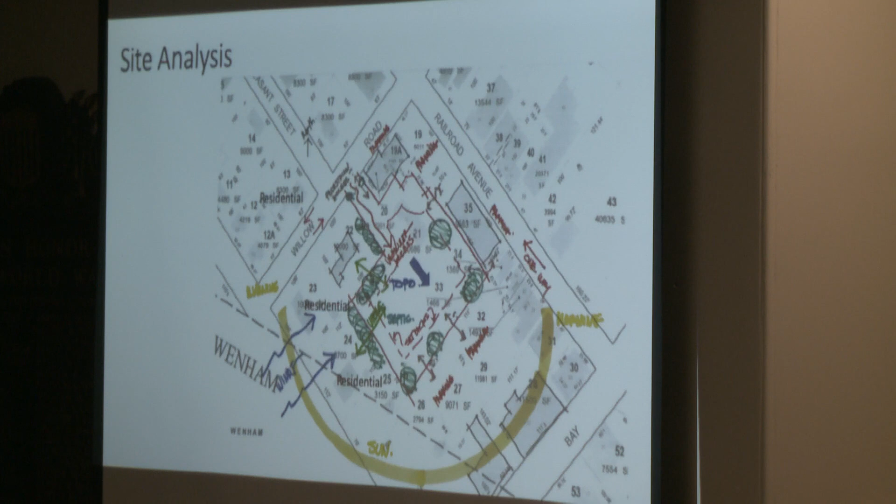And then, of course, we have the existing site plan that, as Joe mentioned, the high point is at Willow Street, and it comes down to kind of a bowl shape. Charlie and April will discuss the fact that this collects a pretty good sized catchment area of surface runoff and how that would be handled.

The other things to note on the site are the residential properties bordering it on Willow, and the commercial properties on the other two sides, which kind of informed where we decided to put the building. So this is where we ended up.

The building is kind of L-shaped. You see here it's pushed as far toward the Railroad Avenue side of the property as we could. We have a 15 plus, maybe 6-inch foot setback on that side, to allow the maximum amount of buffer zone to the neighbors on this side.

There's a stand of really tall trees in here, which we wanted to preserve. We've got a fence coming in here, a 6-foot privacy fence, a row of arborvitae here, a mixture of cedar and plants in here, and some Rocky Mountain cedars. So the combination of eastern white cedars, or eastern red cedars, and Rocky Mountain cedars are in here to provide a good buffer.

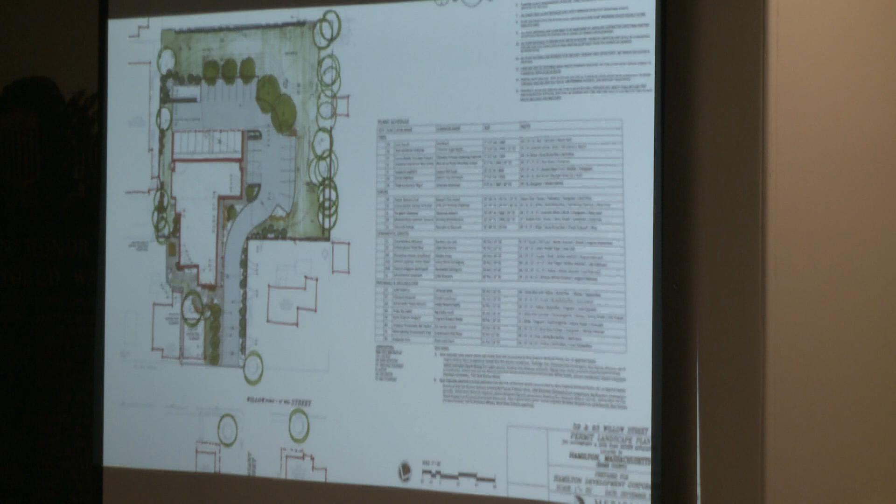So in the floor plan, the far left of the sheet is on the Willow side. This is that colonnade I talked about. A T-shaped building does reduce the apparent mass of the building because you sort of see one leg and then see that leg rather than the whole length. This side, of course, is against the Railroad Avenue side.

As mentioned, that's the commercial space, and then these are all support spaces for the residential project - the sort of birthday party room called the Commons, and a fitness and wellness room. Sometimes folks want to work at home, so we give them a little office they can work from. There's storage for tenants for some of their larger items, and then trash would be brought in here and then brought out this way. And again, as Jill mentioned, an elevator, and then of course the carport for the balance of it.

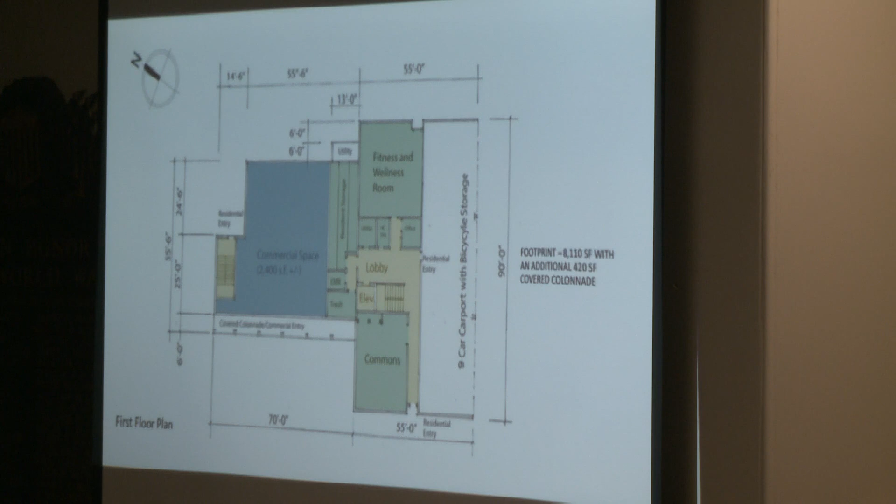As you go up to a typical floor, the second and third floors are generally identical. There are, as shown here, 18 units, 9 per floor. 4 of them are 2 bedrooms, 14 of them are 1 bedrooms, so a total of 22. It's about 8,300 square feet per floor. We have the 2 bedrooms on the ends here, kind of on the corner.

Where it seemed appropriate to provide some exterior small balconies, we've provided them. There are some places where we have these Juliet balconies, which is basically a doorway opening up to a railing that allows some fresh air in and a little more light, but it's not something you'd step out onto. I know at one of the abutter meetings I wasn't at, but I understand there were some balconies here, and there might have been some concern about being a little bit too close and looking into their backyard. So we thought pulling those back would be beneficial as well.

But so basically, the typical floor plan has a ring, this sort of L or T shape of units wrapped around a central core that has an elevator and a stair, and probably a skylight on the roof that might let some light down into the middle of the building. Units are roughly 650 square feet for a 1 bedroom, which is a pretty good sized 1 bed. There are a couple 1 beds that are a little larger. Sometimes we'll put in a small open alcove room where somebody might, again, work from home or have a little extra space within their unit. And then the 2 beds are 800 square feet.

The goal is to have these be reasonably affordable apartments, generous enough but affordable. And I think the little bit of extra storage space on the ground floor to have your bike and your artificial Christmas tree or whatever stored off season is being provided. With the elevator, we can have accessibility up so someone visiting who might have some mobility issues can get up to the 2nd and 3rd floor. It's a nice amenity to have in a building like this.

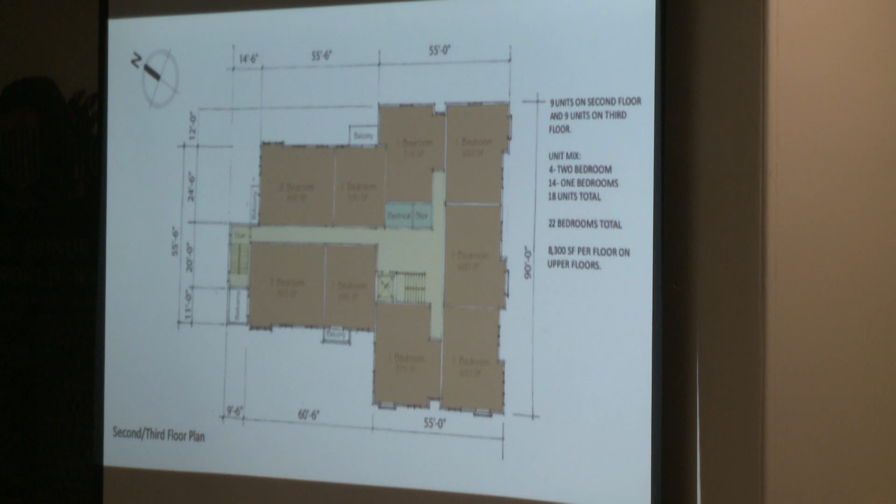The materials are traditional in New England - we have a shingle band running across the top and sort of a clapboarded secondary line, and then kind of a board and batten look down on the ground. Again, kind of layering this helps make it seem a little less tall than if it was just one sheer wall. We have a fair amount of texture. There's like a bay window that pops out here, and these decks help provide a little bit of mass so it's not so much a sheer wall.

The roof, there's a flat spot up here, but from all sides you can't tell, and so that was where we can put our air conditioning units and keep those in the center of the building to reduce any kind of noise impact. Also, the elevator overrun can be contained within that roof structure so that you won't be seeing one of those boxes that I understand can sometimes be controversial.

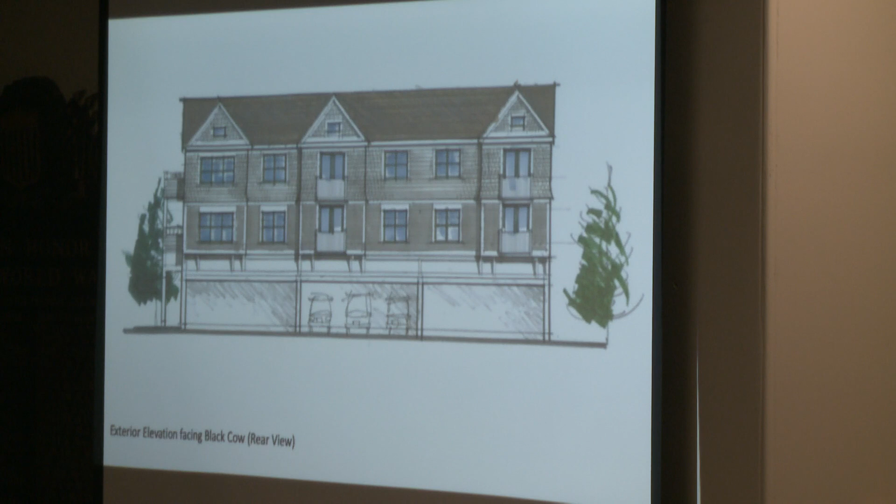This is the carport view from the Banks parking lot and the Black Cow. There's the carport for the 9 cars, and we're using these projected gables to again help reduce the apparent mass of the building and not have it be a big sheer wall, as does this treatment of the shingling versus the clapboarding. Some of these gables are helping to articulate a more traditional New England kind of commercial vernacular architecture.

If you could take down the Timeless Interiors building, this is what that view would be, the Railroad Avenue view. The truth is you really pretty much see this end kind of poking out into the town parking lot, and this end will be pretty difficult to see.

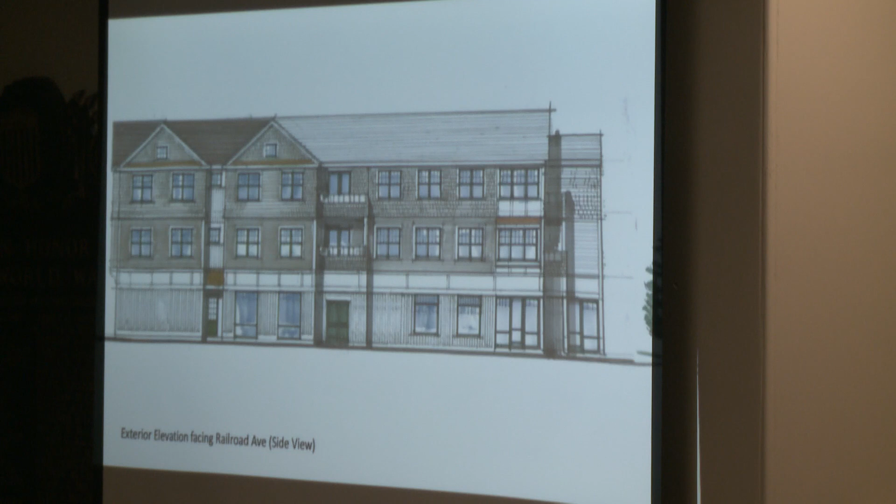We have a door coming out near that fitness area, so folks who might be going for a run can come in and out of that door. This is a service door to access some mechanical equipment, that kind of thing. And you can see those balconies are again helping us, we think, with the massing reduction issue.

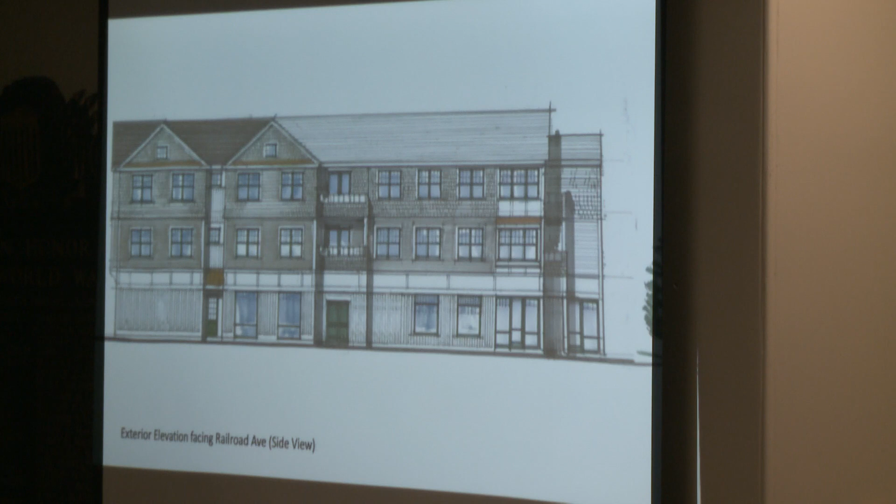L shape does for the massing. So there's a bunch of building in that back corner that you're not aware of from any angle, unless perhaps an airplane.

And with that, I'll turn it over to Charlie or April to talk through drainage and utilities and all that. And then at the end, I do have slides with some cross sections that will answer your question, Mr. Clark, about total height and that kind of thing. That's okay.

Step to the next one. What do I press? Next one. Okay, I'm gonna

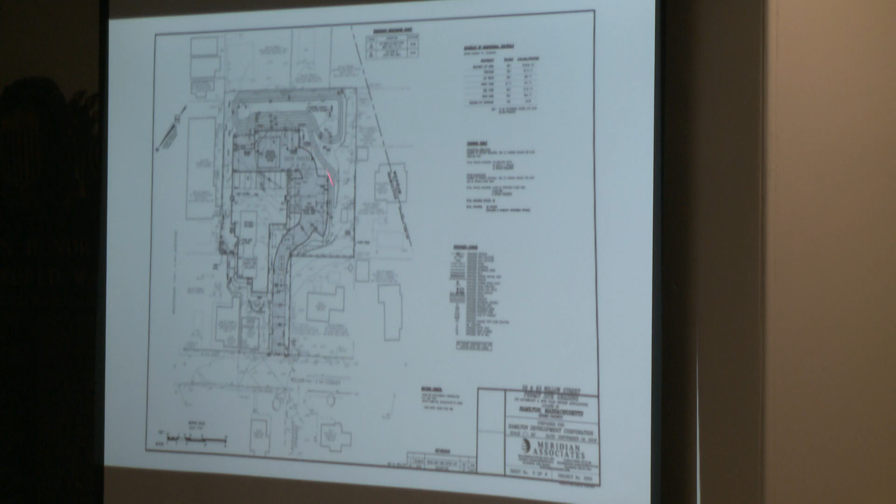What about my basement? Is my basement going to flood? Two things about that. Number one is that the stormwater which runs to this site is the same volume of stormwater that runs there now. The stormwater doesn't get out of the site. As I said, there's no outlet.

So the water that runs is about 2.2 acres that runs. So the volume of water in both the pre-construction condition and the post-construction condition are the same. So we're recharging the same amount of water to the ground.

The second part is, what about your septic fields? You're adding water from that? Yep. Okay. And in a septic system, the septic system here, if you take the amount of water that runs—and I'll get back to that—the septic system is about 2,600 gallons a day. In terms of cubic feet, that's about 350 cubic feet per day.

It's less than 1% of what you would anticipate in a large rainstorm. It's a very small amount, comparatively speaking, of the total water that gets there.

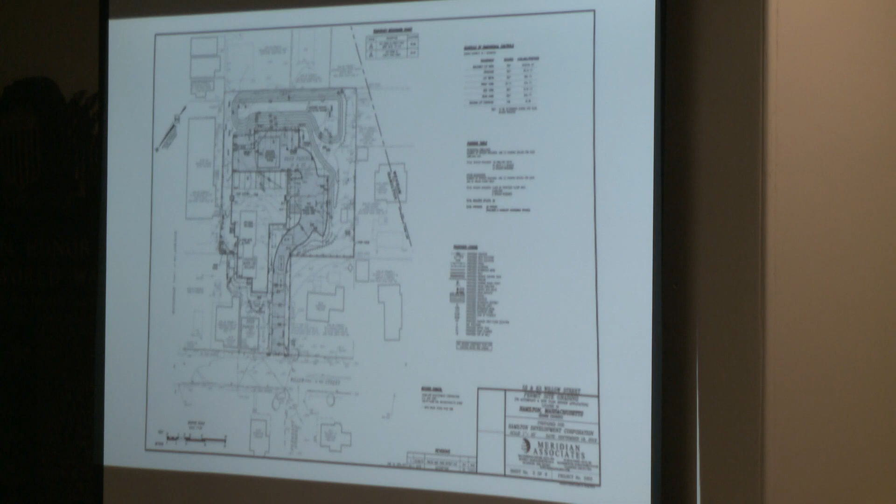And the reason I had started off with the explanation about the groundwater, in comparison with a river, is that in situations like this, the impacts—the groundwater—there's really too much water for even 2,600 gallons a day, and that's why I go back to this.

This is really a very small site. Just imagine that this whole area is groundwater that's running, and we're adding a small amount. Actually, we're not adding any amount from rainfall, and we're adding a very small amount compared with the septic. What happens is there's just too much water to raise the groundwater table.

Now you will get what's called a mounding effect. The mounding effect will happen directly below the basins, directly below the sewage system, the septic system, and it'll happen right directly below the drainage system.

That mounding is usually only a few inches, and given this type of soil, the very gravelly soil, you probably will only get a mound of a few inches, and it dissipates very quickly when you get away from the basin itself.

Usually only 10 to 15 feet beyond it, and then there's no impacts at all. So that's why they call it a mound, because it's a small mound that occurs over the system. So the installation of the septic systems and promoting infiltration on the site, which is occurring now, will have, in my opinion, no impact on the height of the groundwater outside of our site, and will have no impact on any of the abutting properties, septic systems, basements, or any of that. So I think that's probably about the end of my presentation.

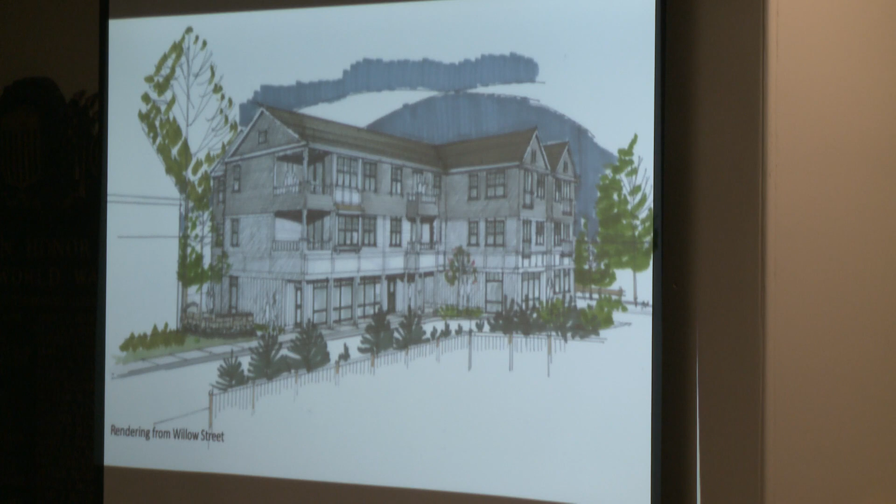Thank you, Charlie. So we took some site sections.

With the road being at, is that right? So it's 56.8 - I gotta get my glasses fixed. 56.8 here and 59.6 there. Yeah, so it just comes down a little bit.

And our building is sitting here, and the height of the roof, Krista, is that elevation from... It is.

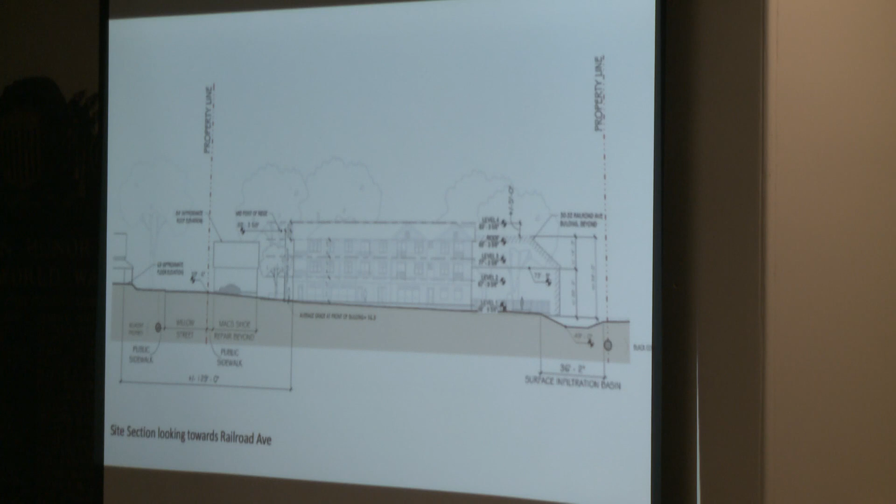Remember, the 35 or 36 feet is not at the wall of the building. We have a sloped roof, and it's well back from the actual face of the building, so you're not seeing it at strict elevation as shown in these drawings. What you do feel is the height of the wall, which is in the range of 30 feet tall. My guess is the town hall might be about that to the eave. It's kind of in that range.

This is where I mentioned we're proposing the new fence and an arborvitae screen in conjunction with the existing trees that are there. Part of the strategy of keeping this building close here and breaking up the parking lot was to reduce the impact here. The septic system is basically far enough away from those trees that we expect them to survive the installation of the septic system.

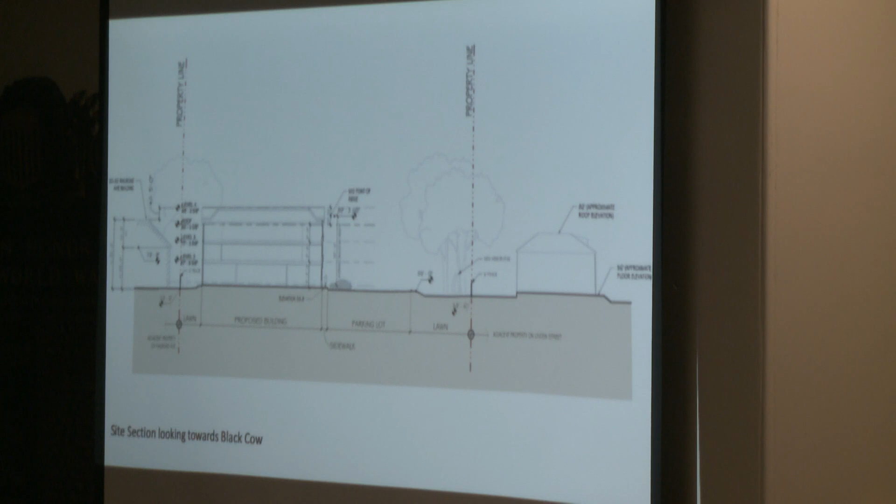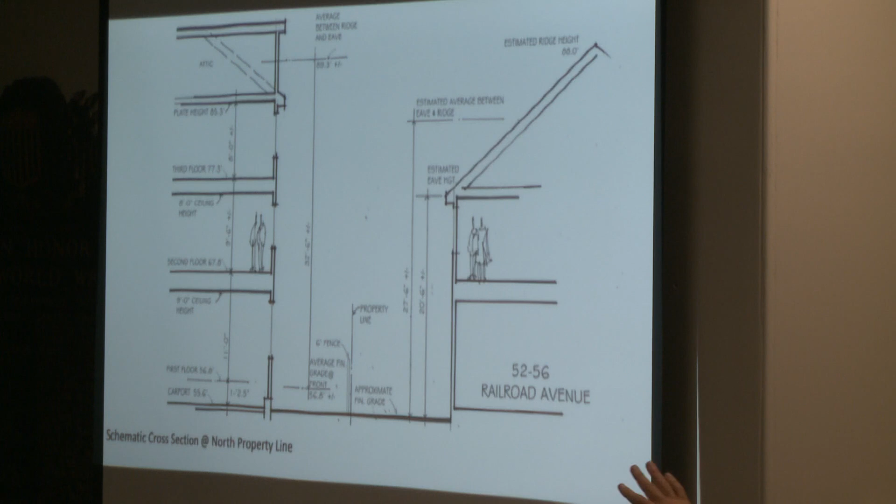If you were to walk in the alley between the Timeless Interiors building, I'll call it 52-56 Railroad, and our building, heading toward Willow, you can see the relative heights. If you're out here on Railroad, you can't see this building. Even though our ridge is higher, it's sufficiently set back that you won't be able to experience it. There will be peaks as you go down Railroad and look through the alley, over the top of the House of Pizza, you'll see bits and pieces of it, but I don't think you'll ever see this thing as this large arc of a building sitting on the site.

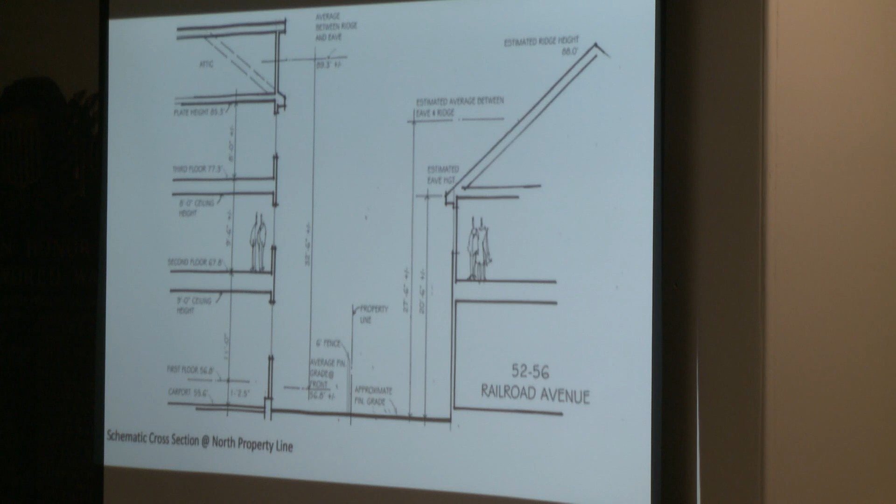We're looking at ceiling heights appropriate for commercial use, not overly generous, 8-foot ceiling heights for the residential units, and then this attic space where, again, we mentioned putting some mechanical equipment, that kind of thing. So we are 32 and a half feet to that midpoint and 36 feet to the ridge from average grade at the front.

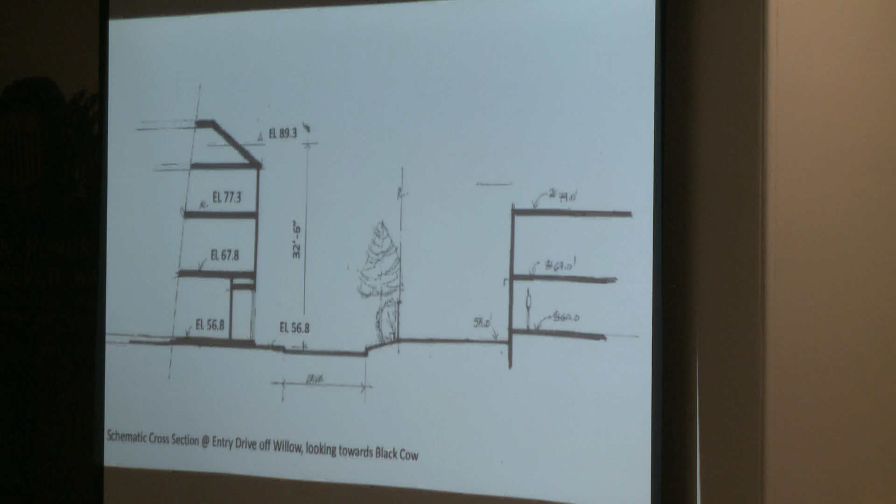And then last, just some lighting. We don't want to overlight this, and we don't think we need to. We have purposely put building overhangs in so the lights can be in the overhang, so you just see the glow of the light, not the source. We have used some bollards to mark walkways, but they're low height bollards. There's no light at all back in here. Even the carport light is up in the ceiling and recessed. There'll be some spillage out which will allow folks to safely traverse the site, but not overlight it.

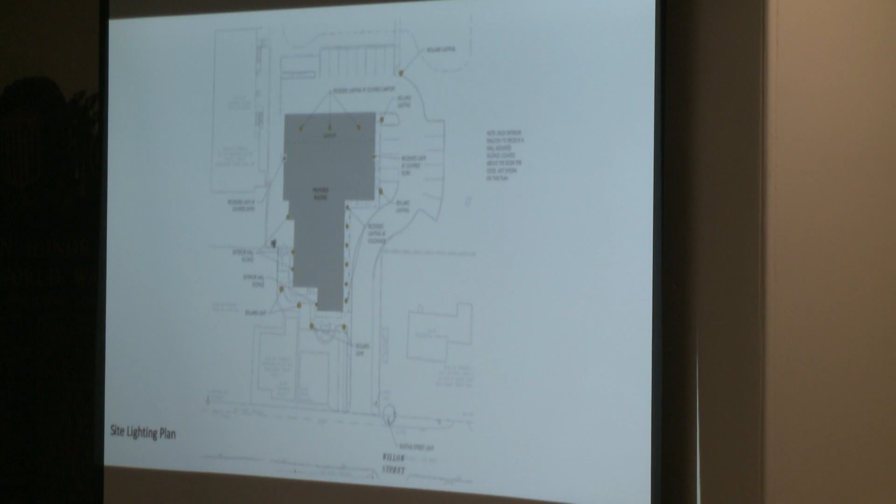By code, we're required to have a light at every doorway. We would use a dark sky compliant light fixture, which is basically a glare-proof fixture, so it keeps the light source down low and appropriate for a residential building. And I think, Bill, that's all I have.

Patrick, do you have some input? I recall it was mentioned that a number of departments have made comments. I've given board members comments that came from DPW, the fire department, as well as the police department. I also have done a preliminary review of the plans, and I did have a few comments I wanted to make for the board and the public.

This is a project that does fit the downtown business zoning as it is adopted by the town of Hamilton. The commercial and residential mix is clearly what downtowns are about.

This is likely the first smart growth project that we've seen in the last several years. There are a lot of elements within a smart growth planning project, but as Attorney Mann had mentioned a while ago, they are to be in downtown, allowing people to be close to jobs, transit, commercial, retail opportunities. There are other things related to that, like pedestrian accessibility on-site as well as off-site, which we'll talk about through the review of the project.